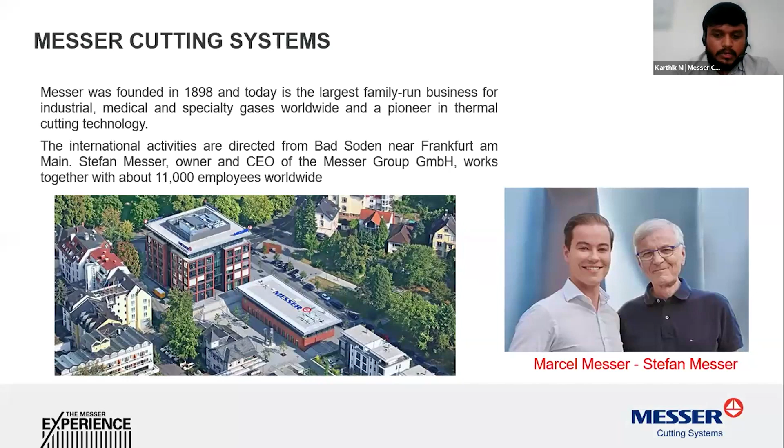I'd like to introduce Messer Cutting Systems as a thermal cutting pioneer who has been serving this industry for more than 125 years, and it is a family-owned business. Our CEO is Mr. Stefan Messer, and the current fourth generation CEO is now taking over this business.

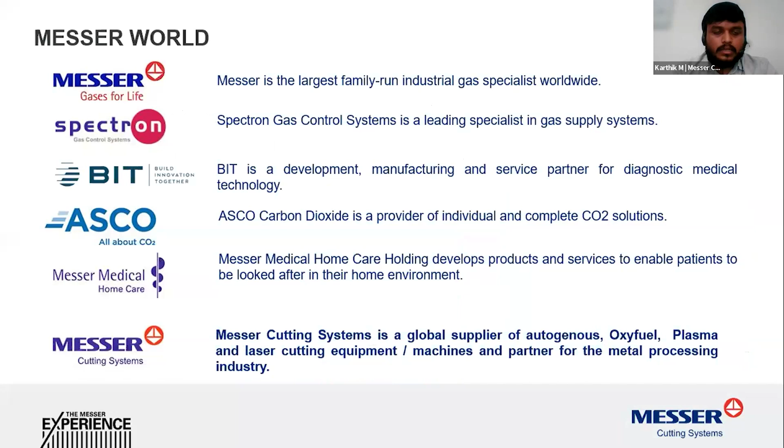And these are our sister concerns who are already in this industry, serving in multiple and diverse categories: medical equipment, gases, cutting systems and everything. Looking at the topic, what we are trying to do is integrating resilience. So I thought of just explaining it.

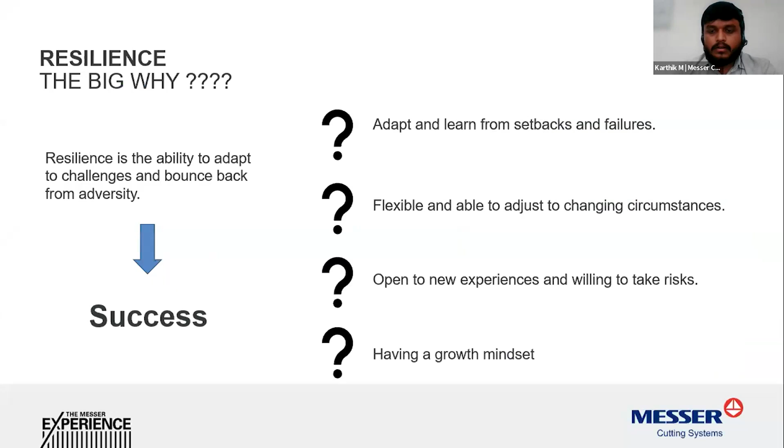What is resilience? It is not just about taking the situation into consideration and bringing us back, but also to learn from the failures and to change ourselves and our business, the way we think, the way we look at the circumstances, and to go on taking new risks and new experiences and having a positive growth mindset about improving ourselves. It can be technology, it could be the process, whatever it takes.

So a brief about the whole industry outlook and how it is directing. There are multiple huge projects coming up in the line in terms of construction and infra. We see many airports, bridges, sports infrastructure, and not just that, but including pilgrimage and tourism. Every industry is now booming in India, and it is a huge opportunity for us to take it and move forward so that we get the most benefit out of it.

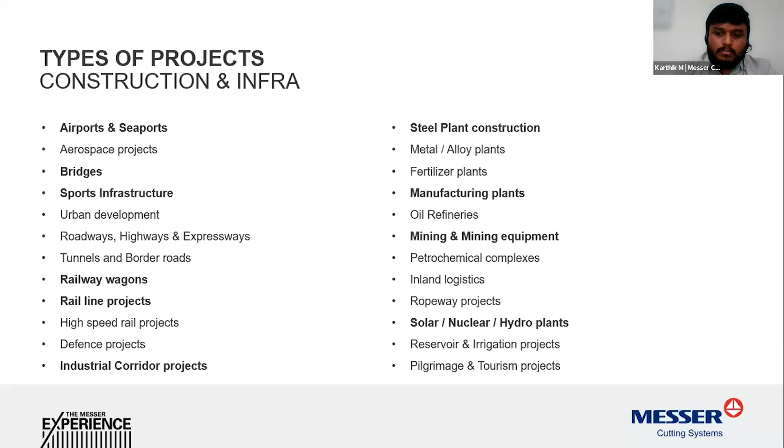So giving a little spotlight to the projects related to the construction and infra industries: we are in the construction phase of all the major bridges, the tallest rail bridge in India. We have laid the first cable stayed bridge in India, and we have a vertical lift bridge in Tamil Nadu, in Ramanathapuram. That's the Pamban Bridge. And we have recently done the Chenab Bridge, which is the world's highest railway bridge.

So all these things, if you see, everything includes steel. Most of the projects under infra and construction use steel. That is why steel is much higher in terms of processing, usage and production across India. And there are many other projects coming up in the budget's plans portfolio; again, we are producing much more steel than we did before.

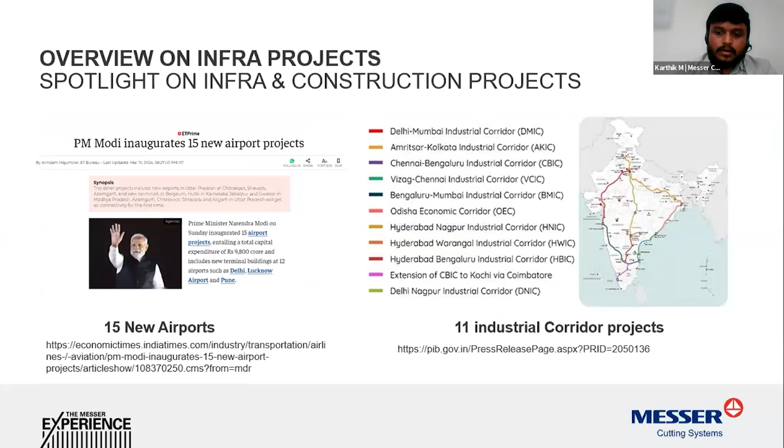And we now have 15 new airports under construction, and there are 11 industrial corridors across India being developed and about to roll out in the next few years. So having understood this huge opportunity, we looked at the indicators of commercial success. So what does it mean?

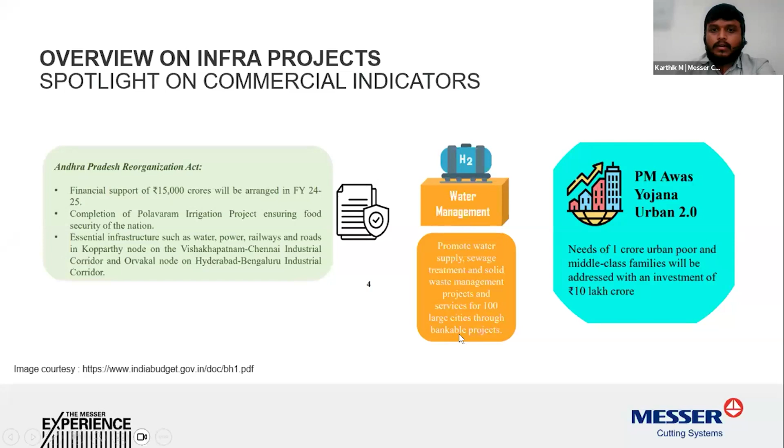So many projects. We could see there are 15,000 crores being invested in Andhra Pradesh, a hundred-plus cities being developed, and 10 lakh crores of investment for urbanization. And we see a grand necklace of industrial smart cities with 28,000 crores of investment, and a record-shattering 70.95 billion in FDI in the 2023-24 financial year.

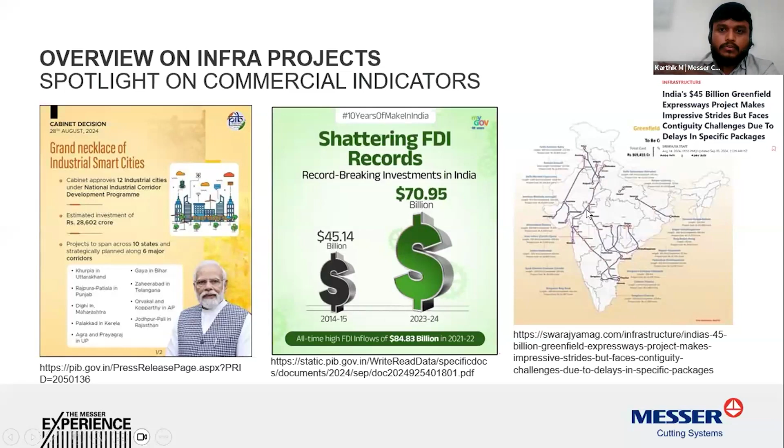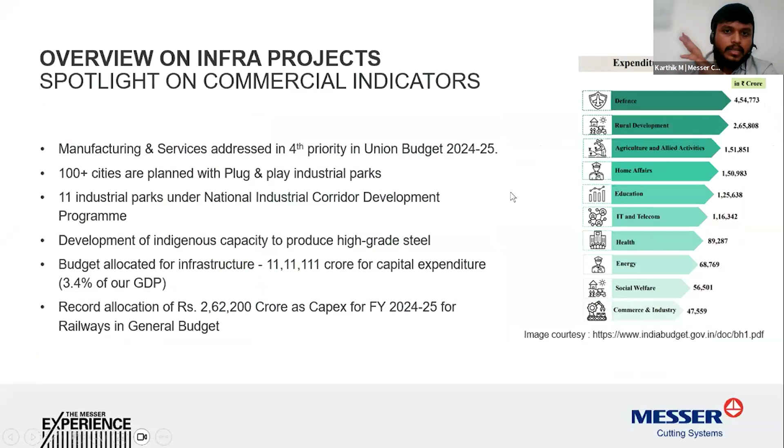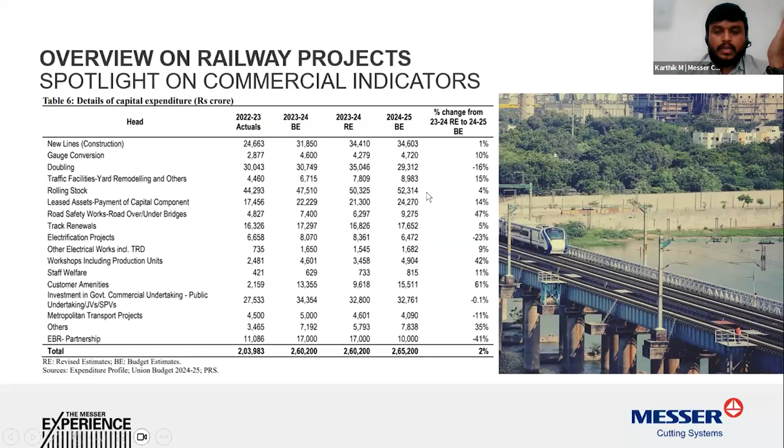And we could see there are 45 billion worth of greenfield expressways, not just government, but also private. So all the projects are huge mega structures and mega projects. And in total rural development, apart from defense, 2,65,000 crores of money has been invested in the construction and infrastructure industry alone. Then the railways exclusively: new lines, gauge conversions, doubling, rolling stock, everything. And that is only for construction and infra.

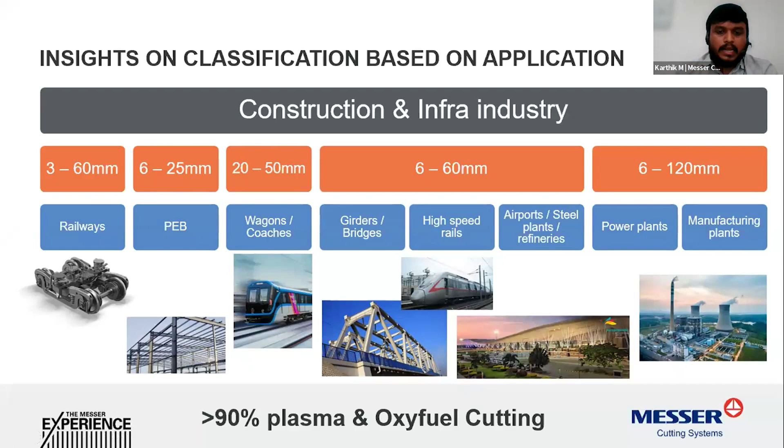So when we look into all these projects and try to summarize, how does all this steel get into infrastructure? We could categorize this into railways, PEBs, wagons and coaches, girders, and power plants and manufacturing plants. Within these segments, more than 90% of the industry is steel, and the basic process used for processing the steel into the actual components is plasma and oxyfuel cutting. And that's how we cater to this industry.

So before we go into the products, why is steel much preferred? Because it is much more efficient, and it has less dead weight compared to concrete structures. It is very sleek in appearance, very elegant, and the installation time is much better compared to a normal structure. And most importantly, when we decommission that structure, it does not go to waste. It is metal, it is scrap, and it has value.

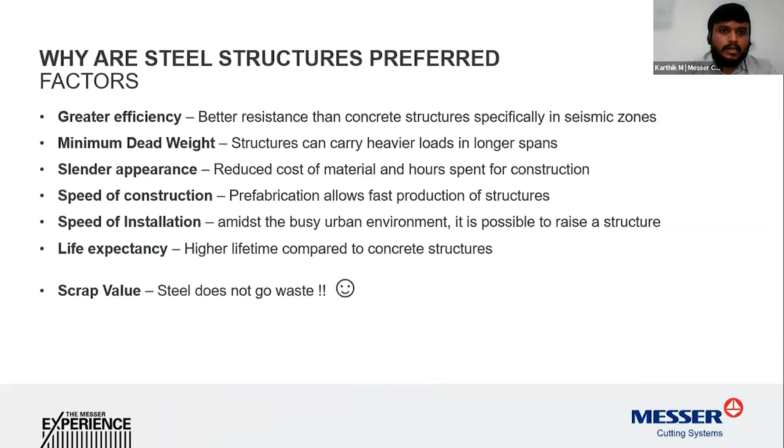So in every aspect, steel is always helpful. So I try to combine this with the overall picture of the basic requirements of what it takes to be a person who wants to do something about this construction infrastructure industry. We have taken a few references from the guidelines, from the basic documents of railway.

So there are no more masonry bridges, which are concrete structures, and steel bridges are the way of life today. That is for two reasons. One is, as I said, it is for quick engineering, and second is also to have lengthy structures which have a life of their own, and it is more rigid towards any seismic effects. So if we refer to the seismic zones, the yellow and blue are the major zones of India. And for that, definitely steel plays a major role.

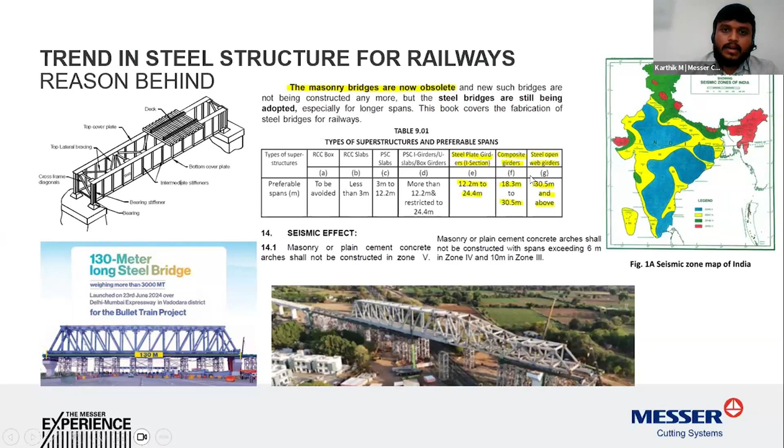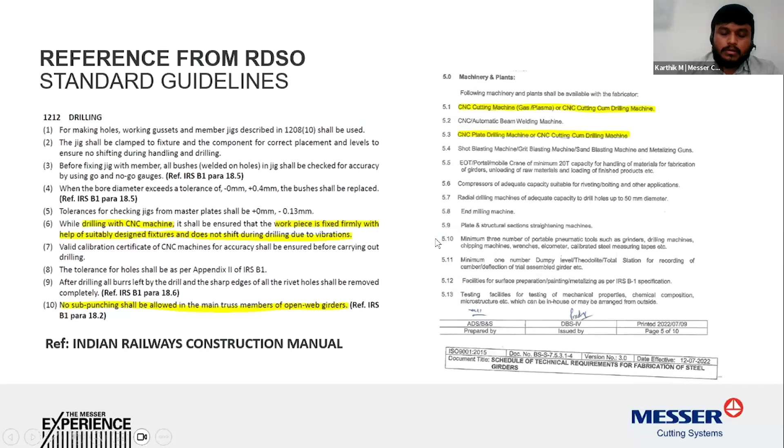So going ahead, what it takes for a person to be a railway vendor, because he should have basic machineries and plants with them as a default thing. So here is how they classify it. The first point itself is a CNC cutting machine for flame and plasma. Again, CNC cutting cum drilling machine and CNC plate drilling machine. So these are the basic things for any steel or fabrication person who wants to contribute his efforts or his products towards the steel industry.

And not just that, when flame cutting is deployed on a plate of a long length, a suitable stitching method should be there. That is not actually possible with a manual process. It is usually done with a CNC. And that is how Messer Cutting Systems brings their products into the picture.

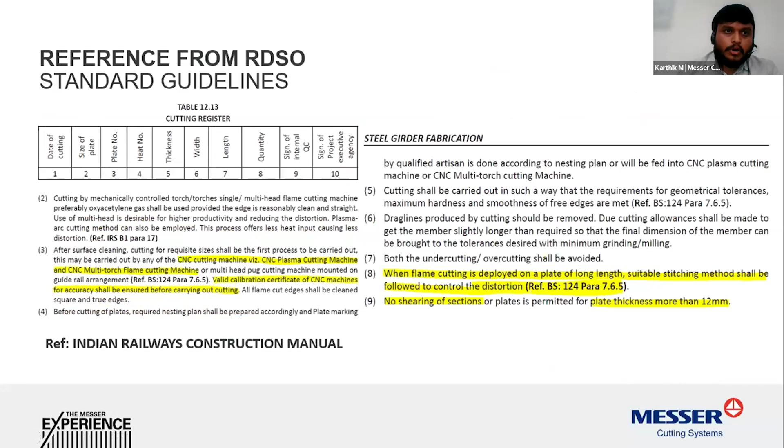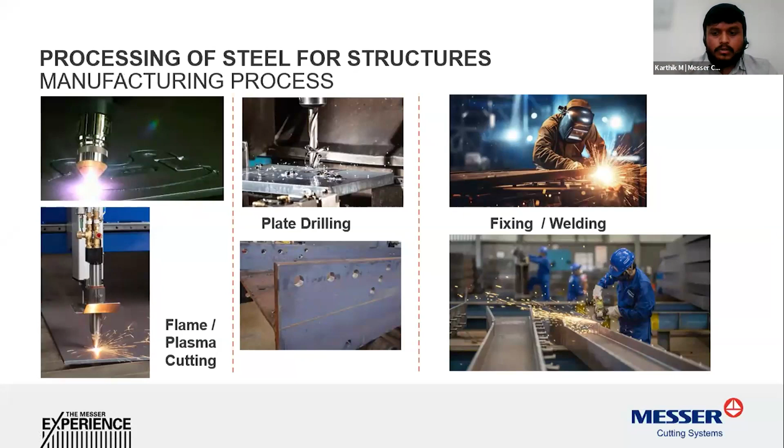So going ahead, this is a normal process cycle that we talk about. Usually it is a flame or plasma cutting, then we go for drilling, then we go for fixing and welding. So having understood this process, what does it take? It takes high productivity, obviously, that is the need of the hour, and it takes accuracy in jobs because you cannot afford to lose your job, and ease of handling and reduction in post-processing.

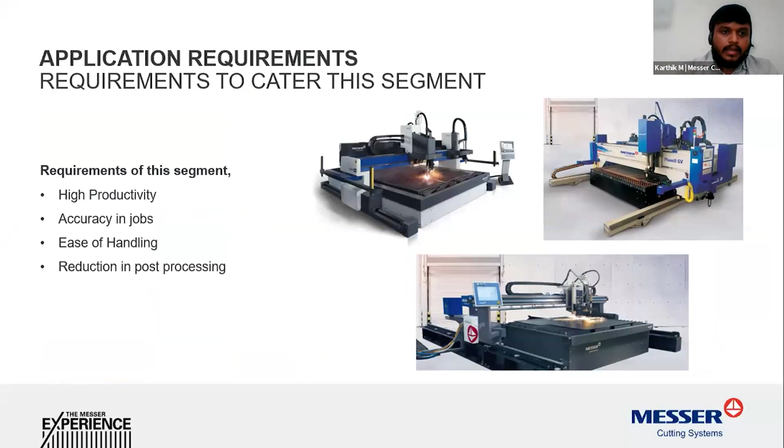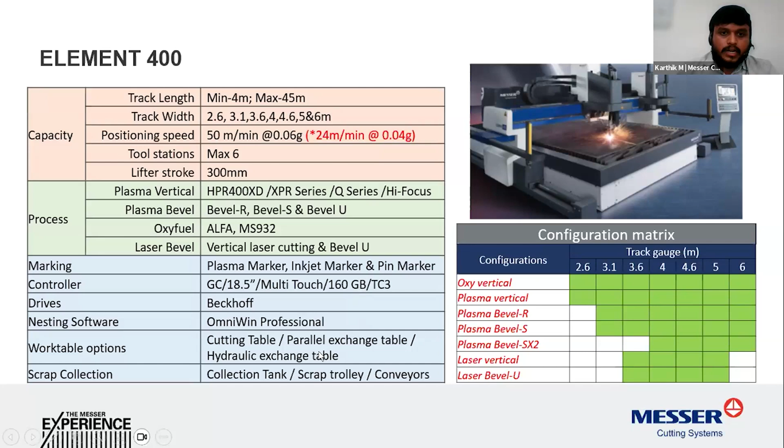So moving ahead, this is one of our flagship models which has all the components, including vertical cutting, bevel cutting, straight cutting, multiple kinds of markers, including inkjet and pin marking, where you can identify the components and things like that. And it's not just with a stationary table, it also comes with a parallel exchange table where you can have productivity doubled in just one go. And these are the major features.

I don't want to go into the details of it, but this machine is capable of executing all the cutting parameters, all the marking parameters, and all the advancements in the industry that a CNC cutting machine can be capable of. And from the operator's point of view, operators can be very comfortably trained on this machine in just one day, so that he is capable of operating this machine right from day one that the machine is installed. So that is the advantage of this machine.

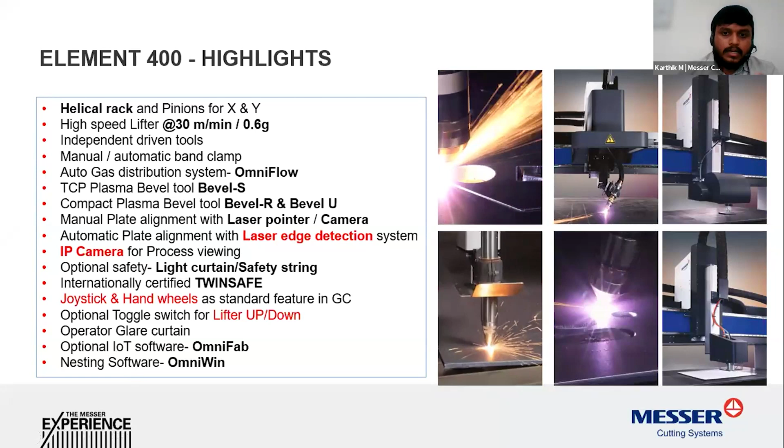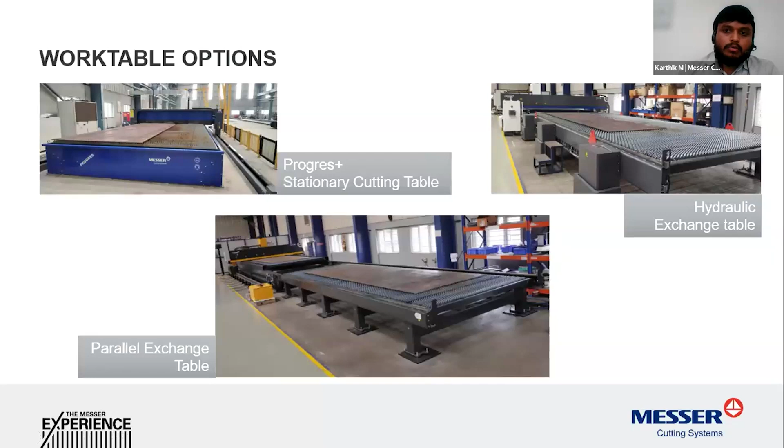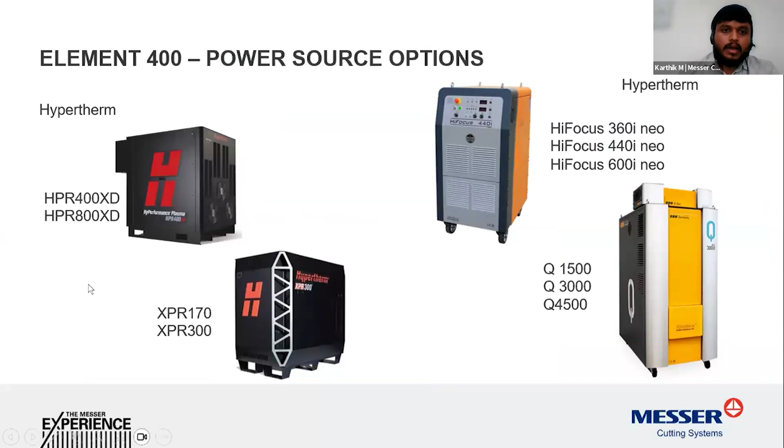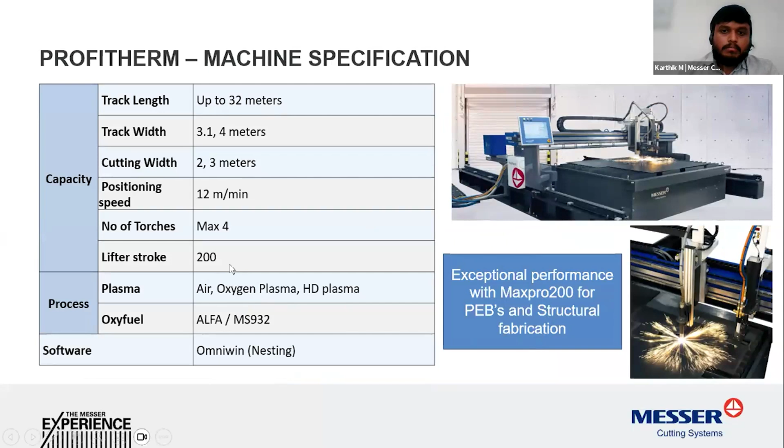And as many people know, there are two major players in this segment who supply the power source. One is Hypertherm, the other one is Kjellberg, and this machine is capable of accommodating either power source. And there's another flagship model of ours, which is capable of up to 32 meters. This particular machine is exclusively made for PEB industries and structural fabrication, because it is powered with a maximum of 200 ampere plasma, and it can also accommodate 4 oxyfuel, or gas cutting, torches.

Again, with these gas cutting torches, if you could see, there's a particular valve over here. There's an automatic one. So far, these gas cutting torches are manually ignited, and they have different height variations and things like that. But our machine is capable of providing that solution with ease: just switch on, the torch is automatically ignited, the plate alignment is taken, and then you go for cutting. Even the piercing is automatically taken.

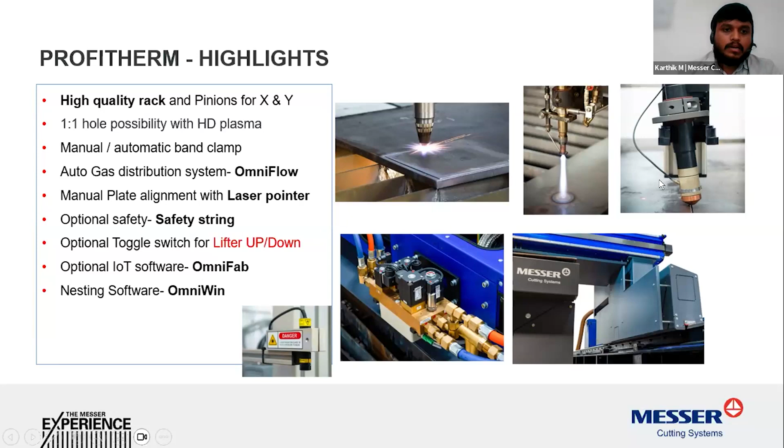So if you could see, there is a small torch that is pushed away from its position. This is because when a plate gets fouled with the torch, the torch automatically tilts from its position, preventing the torch from damage, so that you can manually fix it back and then just start cutting. It is like a plug and play device. And this is also having options like Power Max and up to 200 ampere plasma sources.

This is, again, another very big CNC process. This is capable of having a drilling unit separately attached. So you could see the forward station is for the plasma equipment, and the middle station is for the drilling equipment, where you can go for drilling up to 50 diameter, and you can have a tapping capacity up to M30, and a machining span of 250. So all the base plates, or we would say the structural plates, are manufactured. They just cut and then they go for drilling.

So we could imagine the kind of effort it takes moving from one space to the other, where initially the full plate is loaded on the machine for cutting, and after that they have to take the plates to drilling, and then they have to tack them for stacking with a whole set of drilling packs, and then they have to remove them and move the plates to the other area. So the material handling, or the time it takes to move all these plates, is a huge effort.

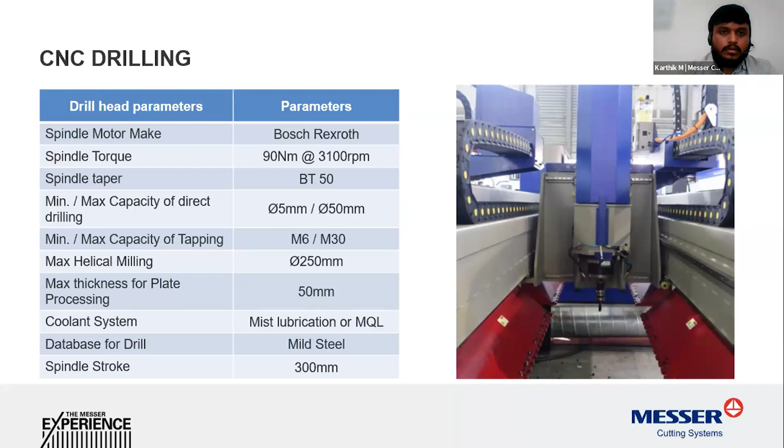But all that problem is sorted out with one single CNC plate drilling machine, where you just have to load the plate in one go, and do all the processes with plasma or with oxyfuel, with drilling, or with tapping. So everything is done in one go, and then you load the plate directly to the end point, where you can go for bolting or welding, whatever it is. And this is also capable with the bevel system. If you want to make beveling, it is possible.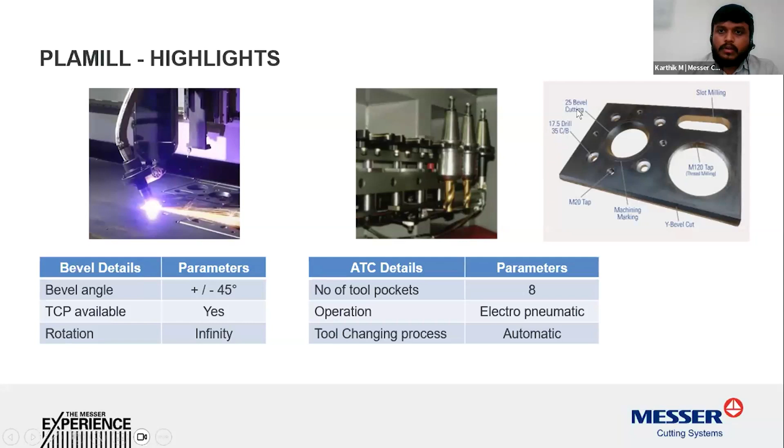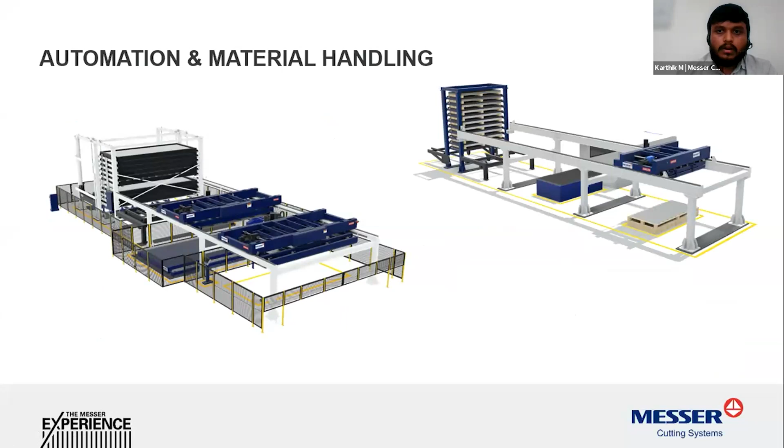Not just this, we also have material automation, and along with this we supply the material handling unit, where the sheet loading can be done automatically, and there are multiple variants of it. It can be combined into any kind of customized solution. If you just want loading, it is possible. If you're just looking for unloading, it is possible. Or if you want the whole system, loading and unloading, still it is done. And these are the other options which are there.

Once the job is cut, the system knows it has been cut, and it automatically updates into your ERP system. And the scheduling, the flow of the process, the drilling sequence, the handling sequence, everything is automatic. And you also have a lot of insightful data with which you can analyze your production capacity. You can schedule your jobs, you can prioritize your plans, so that it is 100% flexible based on your customer deliveries.

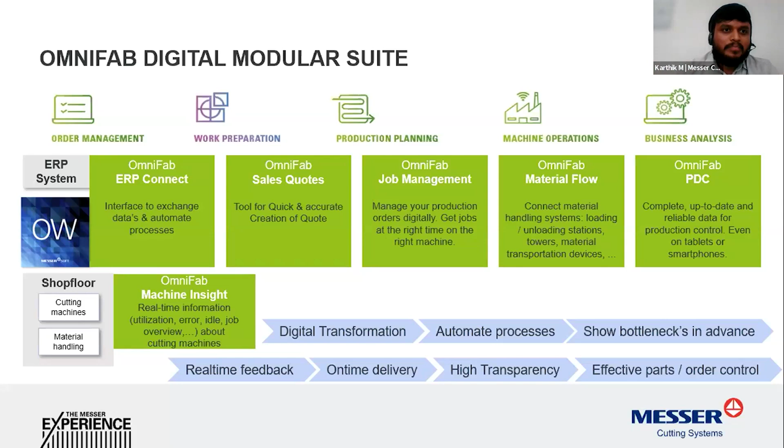And yeah, I did try to give the whole view in just these 10 minutes. Thanks for that. That's the end of my presentation.